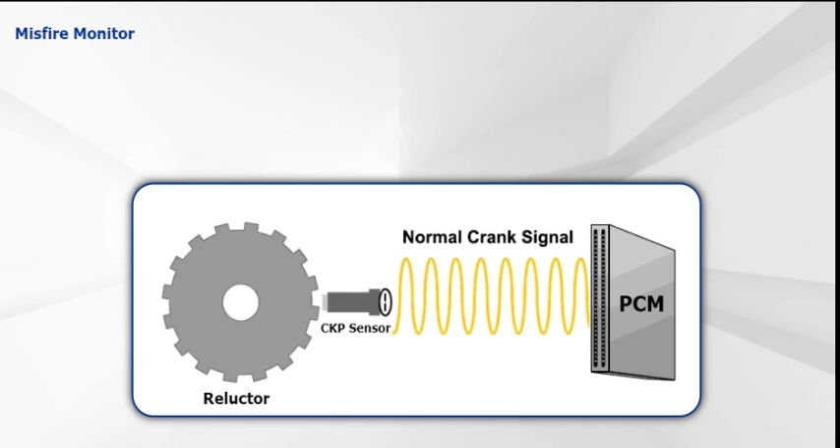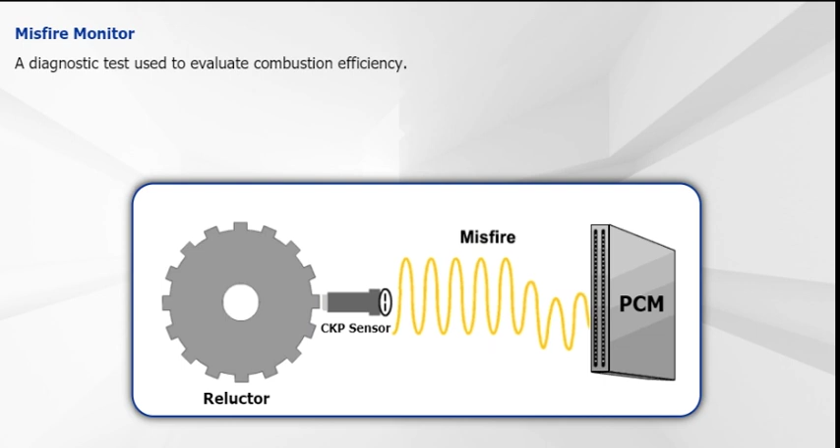Readiness status is one of the required test functions for a scan tool. In this mode, all of the system monitors will be displayed along with corresponding messages indicating if the tests have been run. Keep in mind that readiness status does not indicate whether a given monitor has passed or failed, only if the PCM has executed the test.

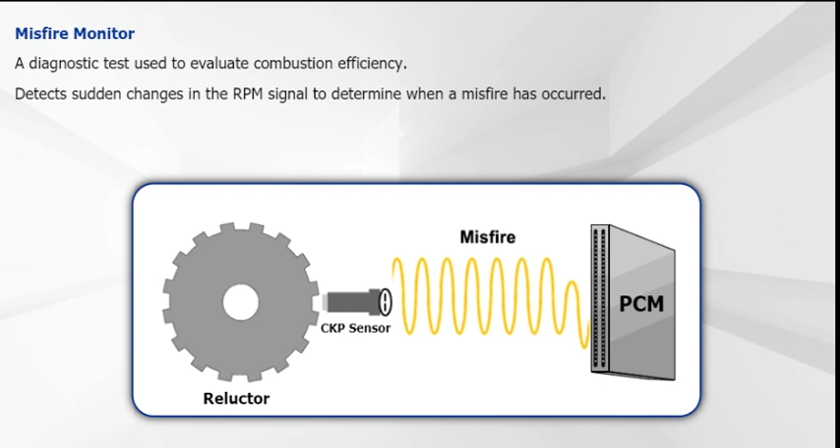The messages used to indicate readiness status vary among scan tools. For monitors that have run, the scan tool should display COMPL or complete. The following scan tool messages are typical for monitors that have not yet run: pending or incomplete. If a particular monitor is not used on a vehicle, the scan tool may display not supported.

Because the continuous monitors are run repeatedly throughout the trip, the scan tool will always display them as being ready. However, non-continuous monitors may not be set to ready if the driver doesn't operate the vehicle in a way that satisfies all of the necessary enabled criteria. Additionally, the scan tool will display the non-continuous monitors as not having run if the battery or PCM is disconnected, or if the DTCs have been cleared using the scan tool.

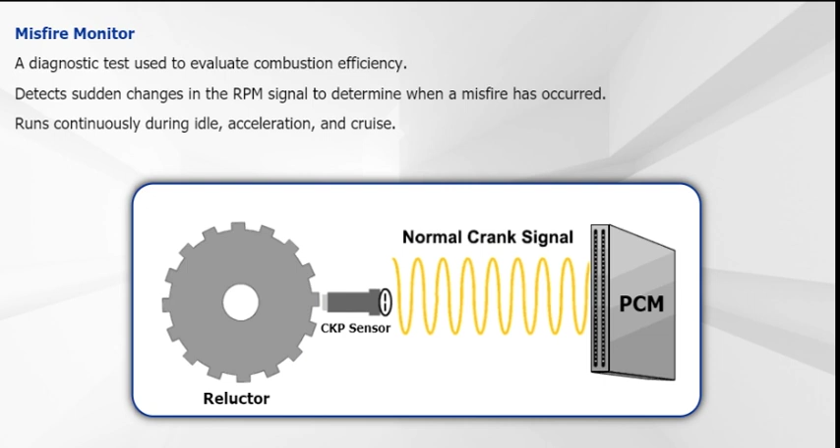Monitor readiness status is an indication of whether the PCM has tested all of the vehicle's emission controls. In states using OBD II IM, that's inspection maintenance test programs, one or more monitors displayed as not ready may cause the vehicle to be rejected for the test.

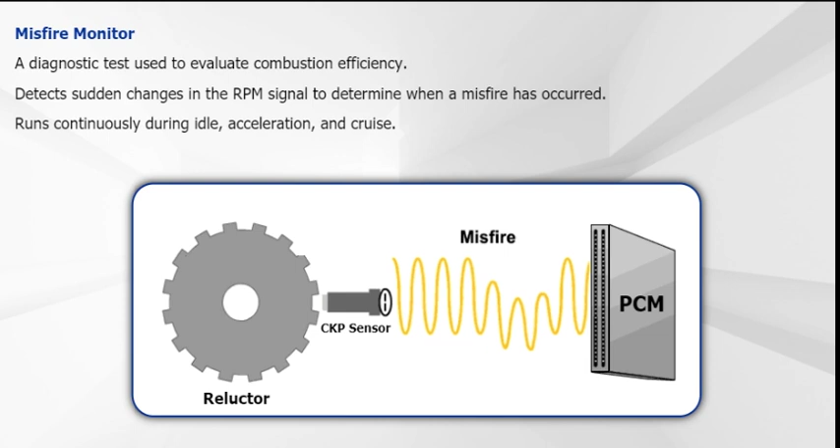A misfire can be broadly defined as being either a partial misfire or a total misfire. A total misfire is a complete lack of combustion. Under this condition, the air-fuel mixture leaves the cylinder unchanged. Consequently, the cylinder makes no contribution to engine power.

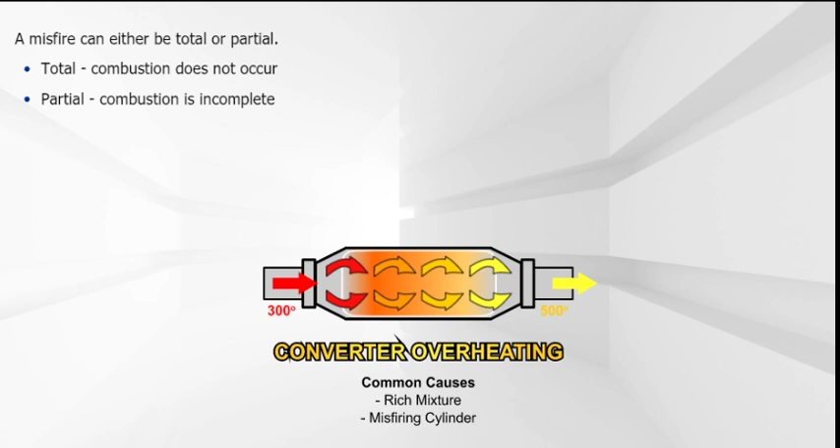In the case of a partial misfire, combustion is incomplete. This causes the cylinder to generate only a portion of its potential energy. Whether partial or total, misfires not only result in reduced performance and increased emissions, but pose a serious threat to the catalytic converter as well.

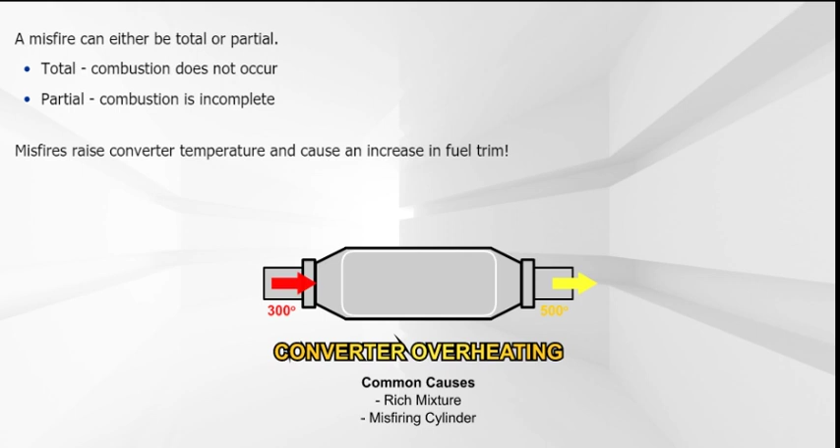This is due to the excessive heat produced when the unburned mixture from a misfiring cylinder ignites inside the converter. Converter temperature is further amplified due to the response of the closed-loop system. During a misfire, unused oxygen is released into the exhaust. This causes a reduction in O2 sensor voltage, which the PCM interprets as a lean condition. As a result, the PCM increases injector pulse width, causing additional fuel to enter the converter.

Misfires fall into one of 5 categories, including mechanical, electrical, lean, rich, and density.

Mechanical misfire. Efficient combustion requires cylinders to be properly filled, sealed, and scavenged. Any breakdown in this series of events will cause the affected cylinder to misfire. For example, if the intake valve fails to open due to a worn cam lobe, the cylinder will not receive the volume of mixture required for proper combustion.

If the cylinder is leaking because of a blown head gasket, for instance, the mixture will not be adequately squeezed during the compression stroke. Under this condition, the piston will be unable to compress the mixture sufficiently to produce the required increase in cylinder pressure prior to ignition.

Finally, unless combustion byproducts are quickly discharged from the cylinder during the exhaust stroke, the incoming air-fuel mixture will become displaced by lingering gases incapable of supporting normal combustion. Consequently, an inactive exhaust valve is another potential cause of a mechanical misfire.

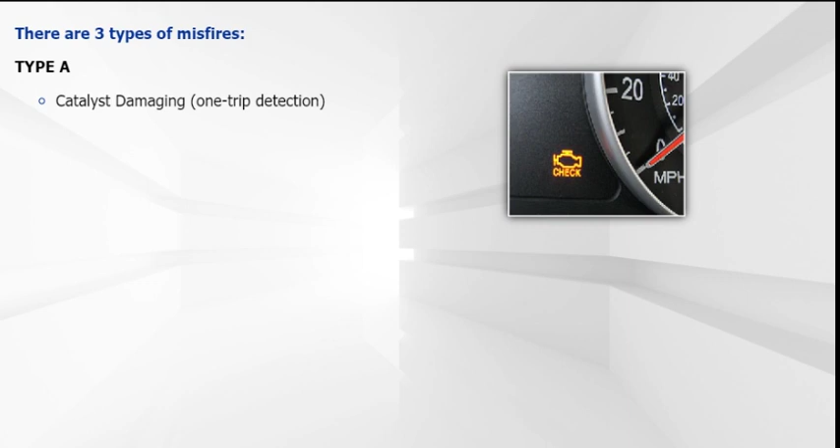Type B misfire is a condition that can cause emissions to exceed 1.5 times the FTP, or Federal Test Procedure, standard, while the severity of a Type C misfire is based on emissions levels exceeding California IM standards.

The first occurrence of either a B or C type misfire will result in a pending DTC with accompanying freeze frame data. If the misfire occurs on the next consecutive trip, the PCM will illuminate the MIL and store a hard DTC. Type B and C misfires will also result in an illuminated MIL and hard DTC if they occur on two non-consecutive trips within an 80-trip window under similar operating conditions.

Type B and C misfires are generally the result of a fuel control or EGR problem.

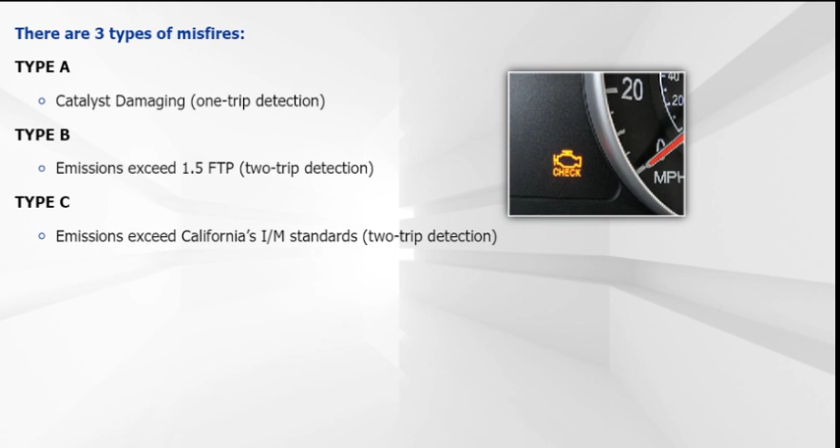There are 13 generic DTCs assigned to misfire detection. Depending on the application, the PCM will either store a DTC for each misfiring cylinder, up to 12 cylinders, P0301 through P0312, or simply store a P0300. This code indicates that a random or multiple cylinder misfire has been detected, which typically indicates that the misfire is not specific to a cylinder, but shared or common ignition components to cylinders.